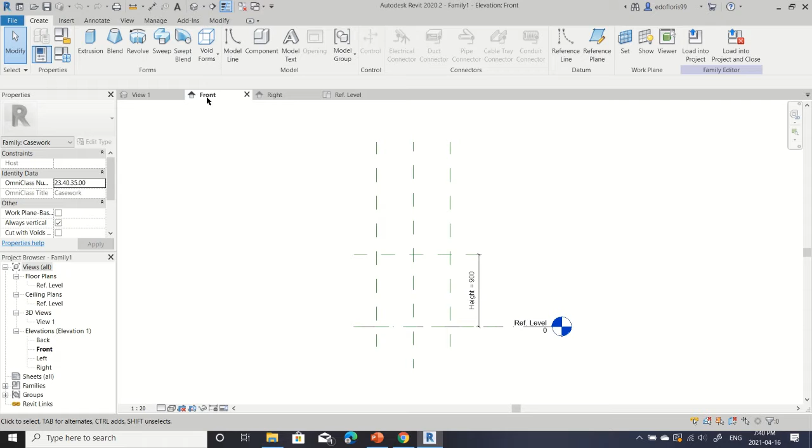So on casework, we're going to have something like this one, and we're going to start from the front, and we're going to create another reference plane here, create similar, and we're going to lock it and offset it 20 millimeters. So 20 here, here, here, and here.

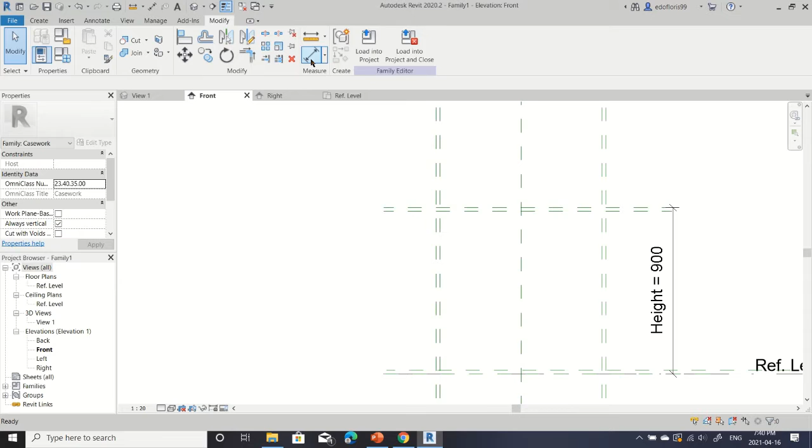Okay, and then we're going to measure for the measurements. Always measure from the strong reference planes because we don't want that one to change. So we're going to actually put them like this. All right, we're going to lock them.

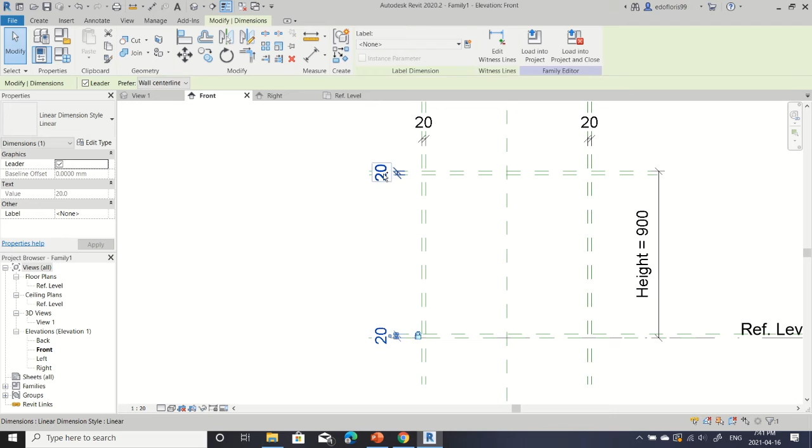Actually, we need to lock, shoot. All right, now we're going to select all of them and create a new label, and we're going to call it frame thickness. Now, if we go on the family type here, we actually have the frame thickness, and we can change it to 30, for example.

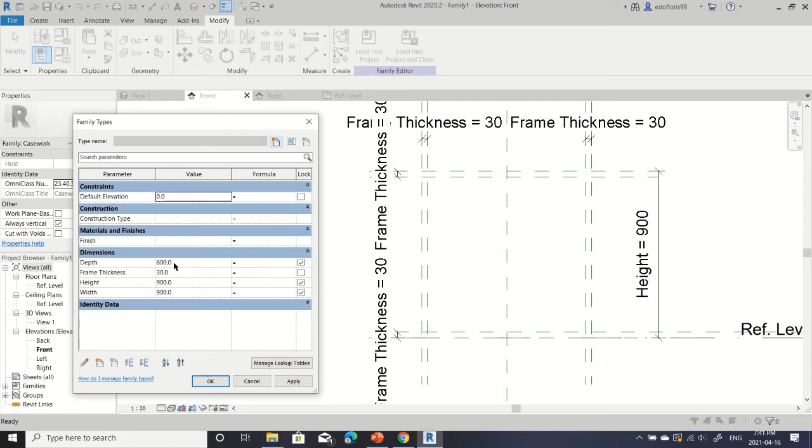Let's put it back to 20. Voila.

Now we're gonna proceed by creating an extrusion. So we're gonna pick up like this, lock. We're gonna select the exterior part and the interior part.

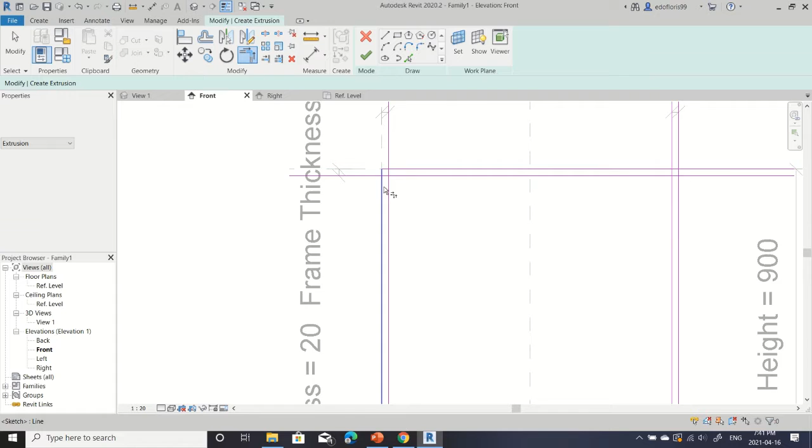And voila. Now we're gonna trim the exterior. Okay. This one, interior. Okay, and this one didn't go.

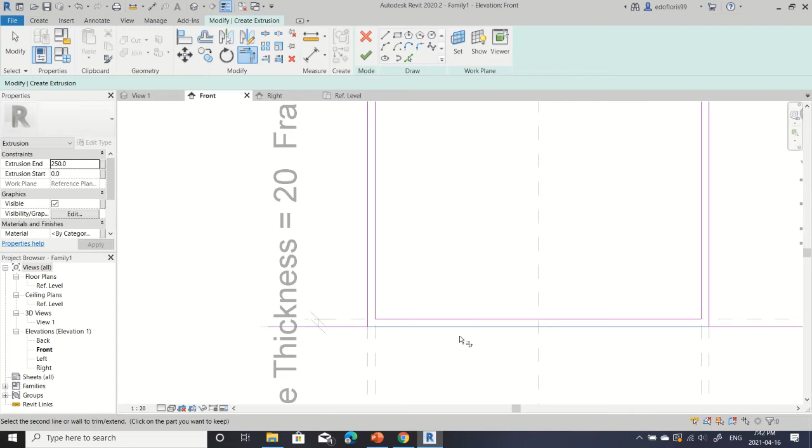What's up here? Yeah, this one shouldn't be there. It was wrong. This one is like this, so trim. Okay, that's perfect. Okay, now we're gonna create it.

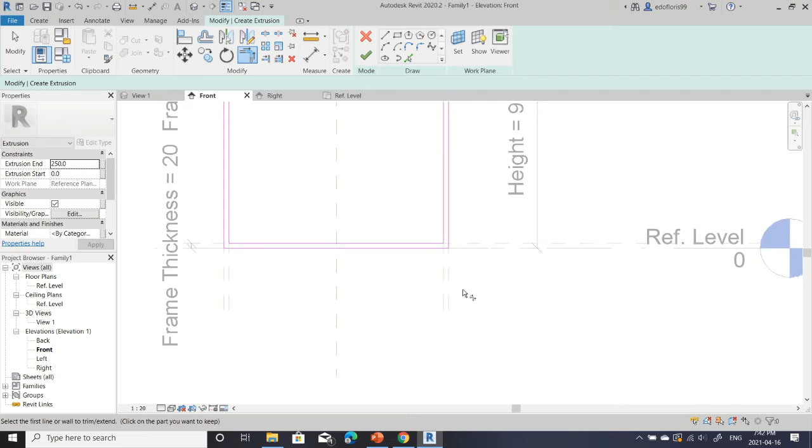We're gonna have this one. We're gonna end up something like this one. Now from the top view, we're gonna move this one here, and we're gonna lock it so that when we change the depth, only one side moves.

So for example, let's put like 800, and this one is gonna move, and this one is gonna remain still.

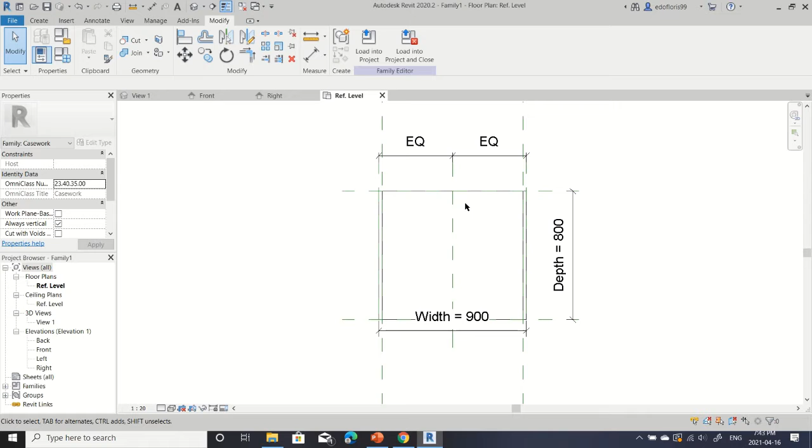Now I'm gonna add the back panel. So I'm gonna get the back elevation, and I'm gonna create another extrusion. This one, always make sure that you lock the...

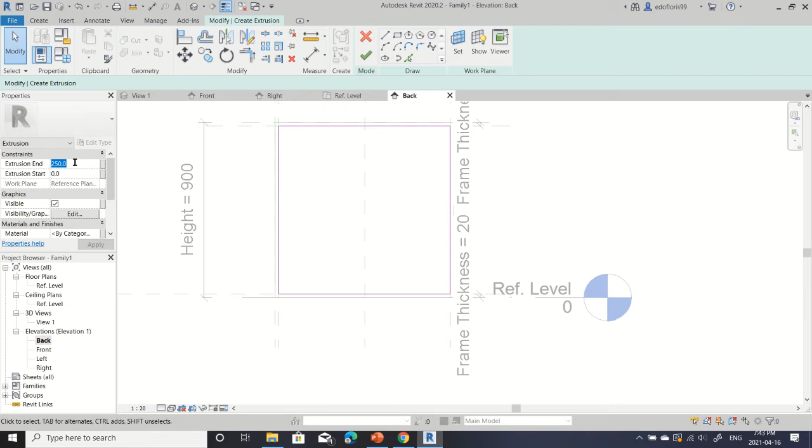Move this one. All right, now we can create the extrusion, and I want it to be 10 millimeters thick. All right, so view one. Now we're gonna have our back panel.

As you can see here, the thickness is perfectly in line with the back of our furniture. Now, next thing that I'm gonna do is put the same dimensions as indicated here.

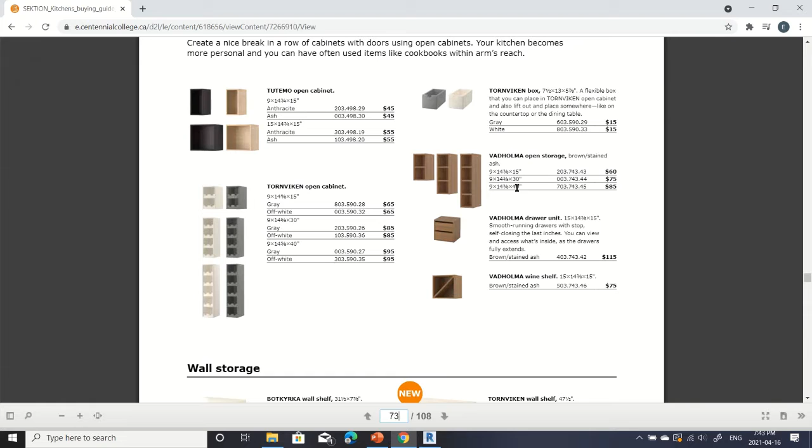I'm gonna take the bigger one, as I said before. So I can just go here and change the dimension. So the depth is gonna be...

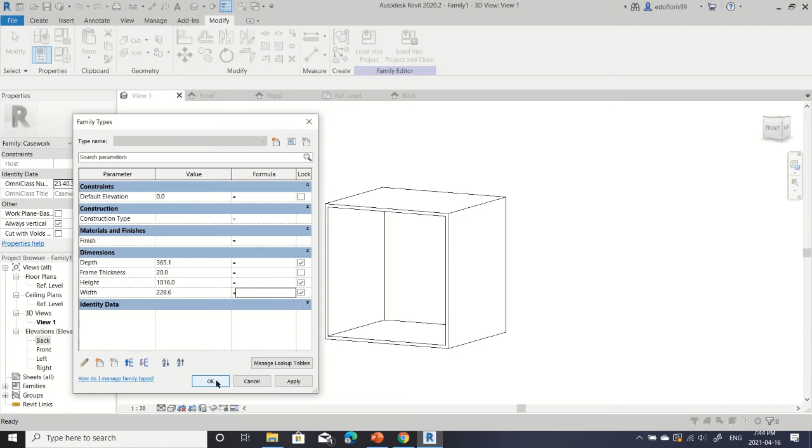365.125. The height is gonna be 1016, and the width is gonna be 228.6. All right, now if we click OK, everything changes, and we got the base for our bookshelf.

Now, next thing that I'm gonna do is create the shelves inside. So I'm actually gonna take here. I'm gonna create a reference plane and put it in the middle from here to here.

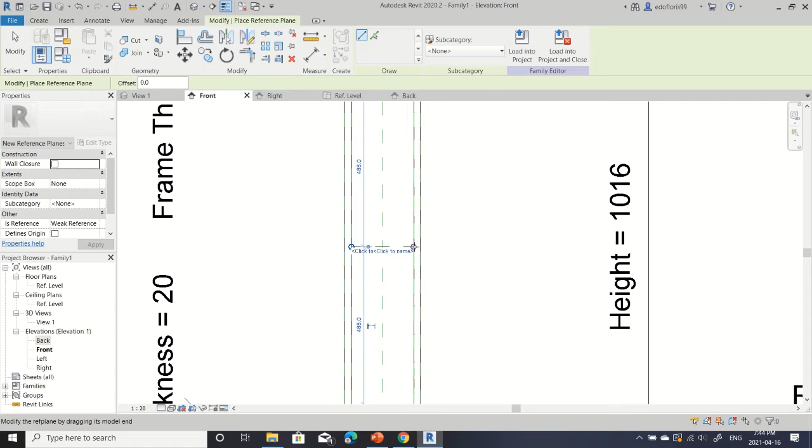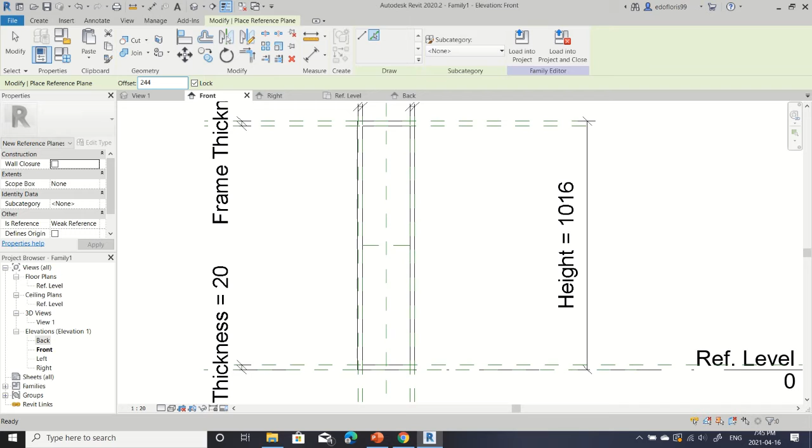And then I'm gonna offset. I'm gonna actually take the distance from here to here, the 488, and I'm gonna offset this one by half of the distance, so 244. I'm gonna do it one here and the other one down here.

All right, perfect. Now, next thing that I'm gonna do is create the shelves. So I'm gonna create an extrusion. Well, sorry, from the plan view, I'm gonna create an extrusion.

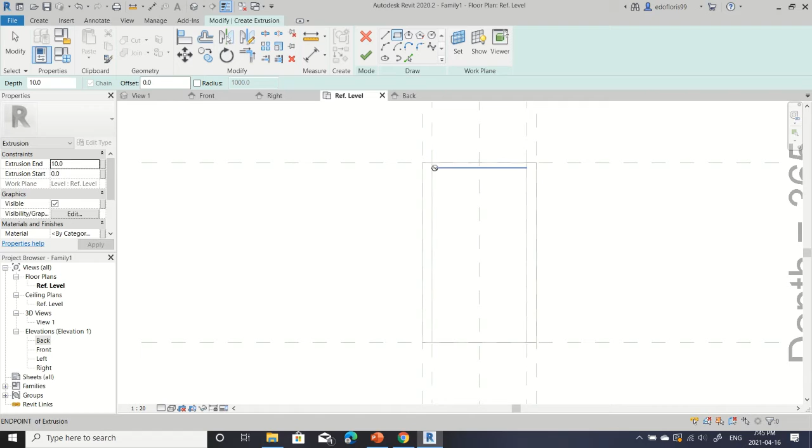You can create a rectangle here. It's gonna be like this, and we're actually going to look at the front now and set the plane which we want it. Pick a plane. Okay, and then we're gonna put it, for example, start with the middle one.

Now we see it moved to the middle one, and I want it to be 15 millimeters, so I'm gonna put it exactly in the center. So it's gonna be 7.5, and here is gonna be minus 7.5.

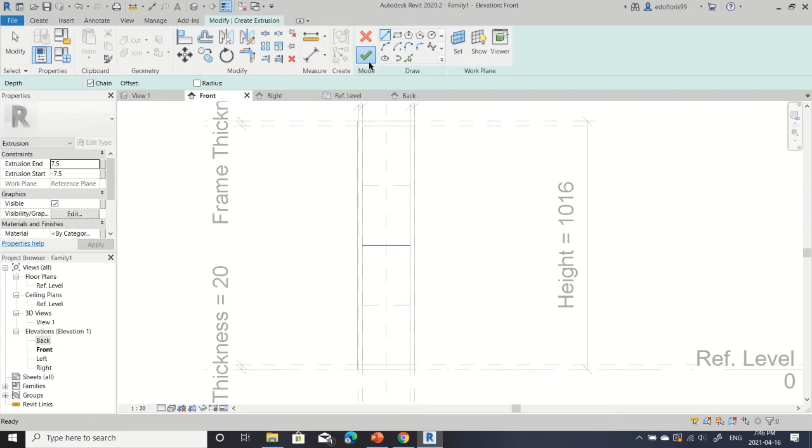If I apply, and then I click OK, this is our extrusion. Now I can repeat the same procedure to create the other two, or I can just simply copy this one. Copy, you pick the center here, and you copy it.

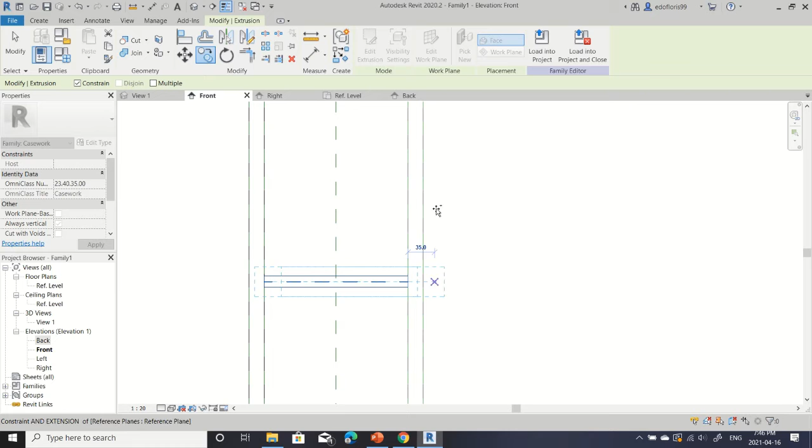I don't understand why it doesn't go up. So I'm just gonna create it the same way.

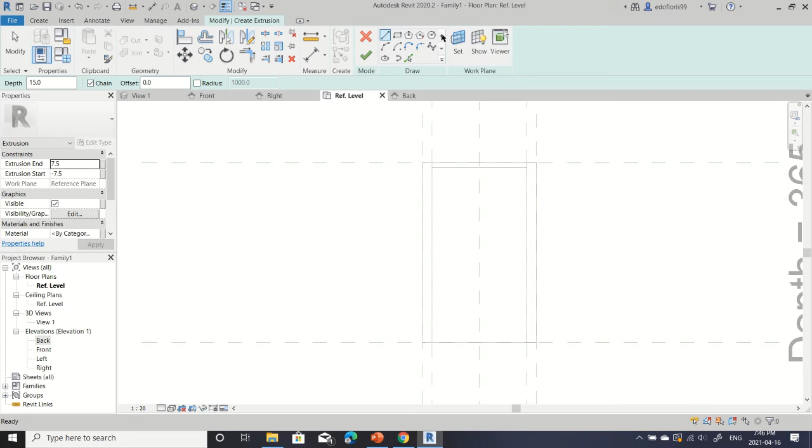So really fast, I'm gonna do create extrusion, rectangle, one here, set, pick a plane, and one. I'm gonna put it up, view, create, and then I'm gonna do the same, create extrusion, set, pick a plane, front, the one down here, open, and then create.

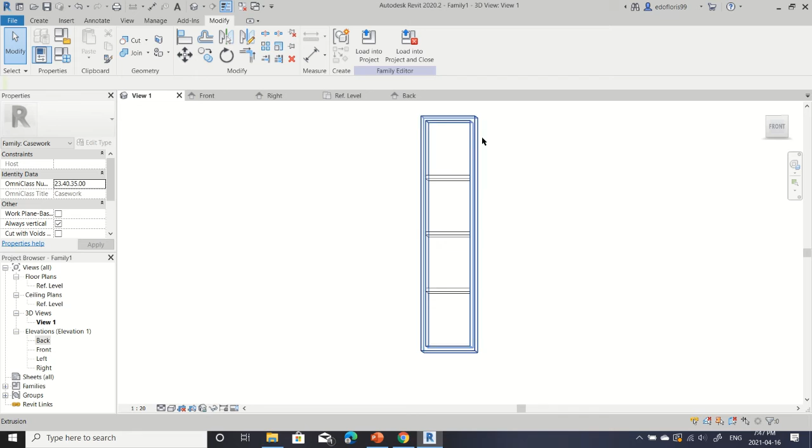Now if we look at the front, we're gonna have our 3 shelves. So the 3D view is gonna be this one: 3 shelves, and the rest of the back panel.

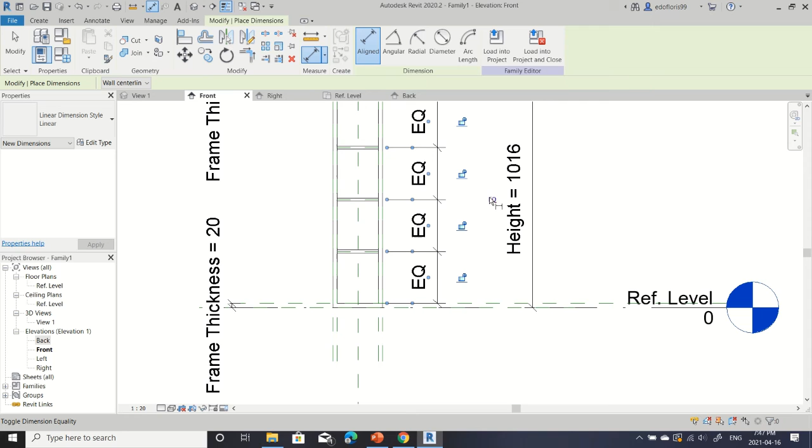Now, something that we can do is we can actually put this one in half of here, half of here, to the bottom, so everything is the same. So we click here, and we click on equal, so that all the distances here remain equal.

And if we want, we create a parameter, but it's not necessary.

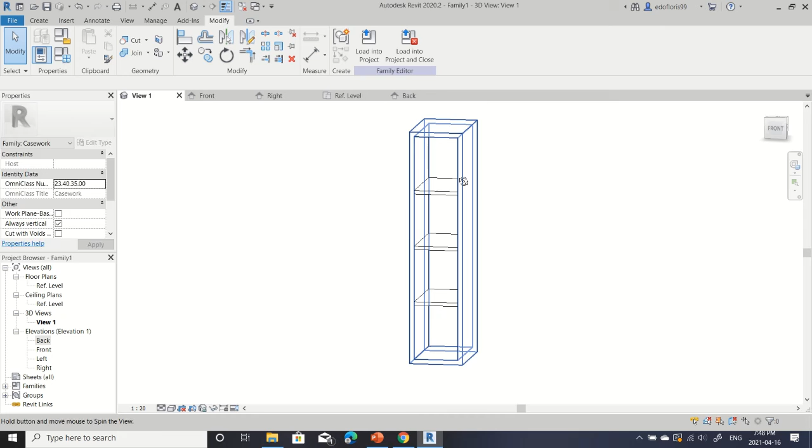Right now, to make it similar, to make it look like the same as here, I'm gonna change the material inside. First, I'm gonna click on the frame, and I'm gonna go here to material, and I'm gonna click, and create a new parameter, and I'm gonna call it frame.

I'm gonna do the same with all the different parts. This one I'm gonna group together since they're all the same, and we're gonna call it a new parameter. We're gonna call it shelf.

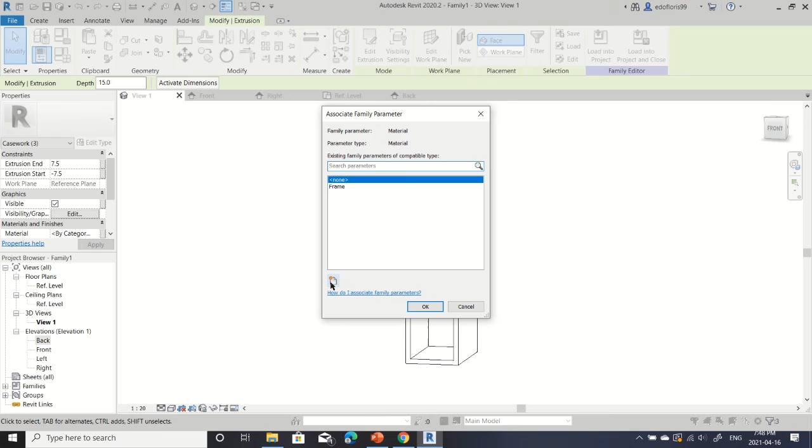And then the last one is gonna be the back panel. Same, I'm gonna click here. I'm gonna add it. Back panel. Okay.

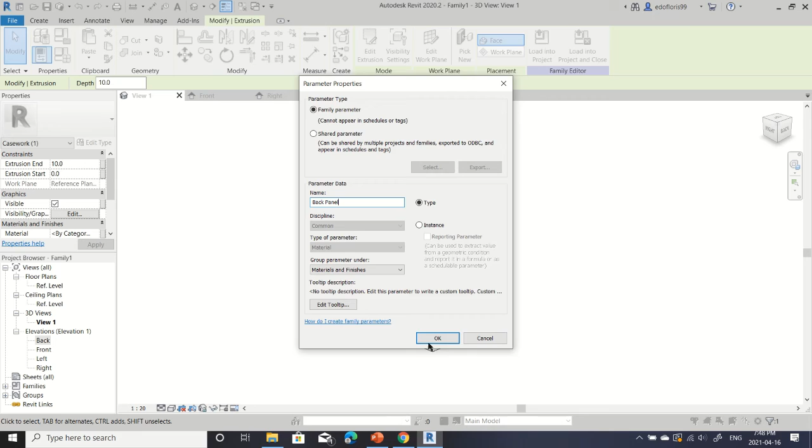Now I can go here to the family type. Family type. And in material definition, I can see what I just created, the parameter that I just created. And I'm gonna start with the panel. I'm gonna click on it.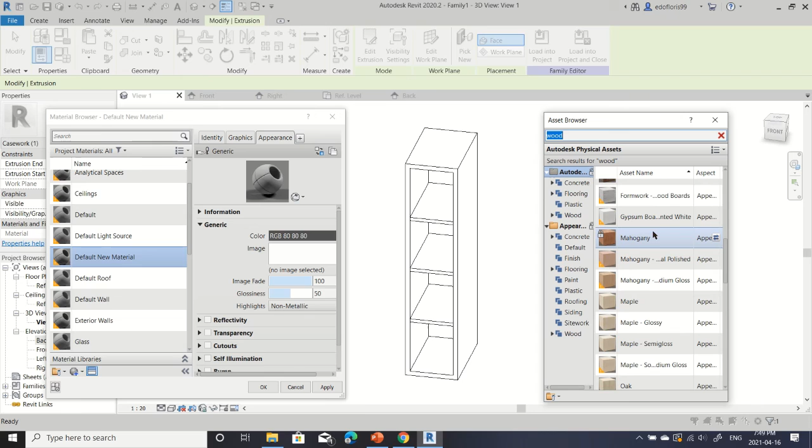And you get this. I'm gonna create a new material, and change the appearance. I'm actually going to put, of course, wood, and I'm going to choose mahogany. So this is going to be the appearance.

So we're going to write it here. The new material is going to be wood, and I'm gonna click OK, and then I'm gonna change this one to the same one, and same for this one.

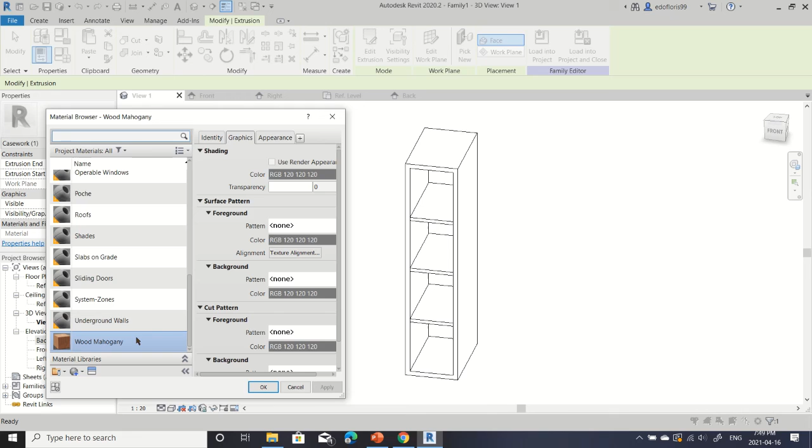Okay, and now I'm gonna put realistic, and we can actually see the colors that we chose, and this is the result. As you can see, it's really similar to the one that we have here in IKEA, and that's it. Hope it's clear, hope it's easy.

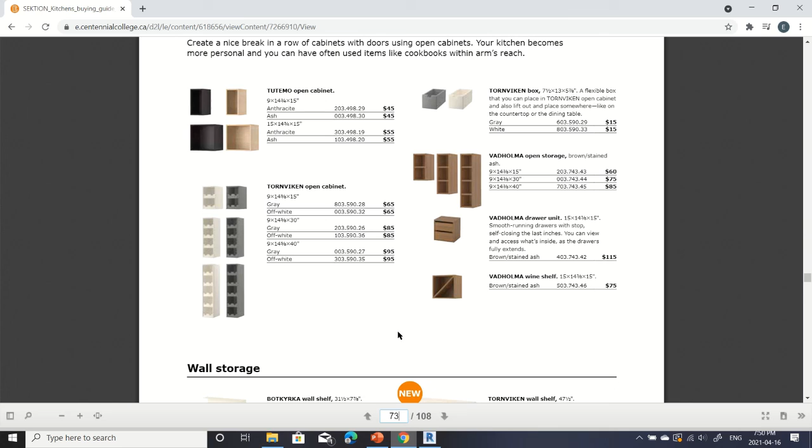And from this one you can recreate easily the other two by just changing the parameters here, the height, and just removing the panels, and that's it. Thank you.